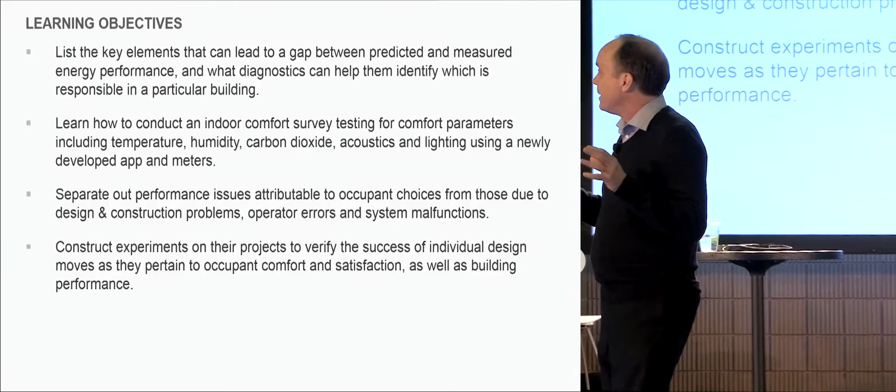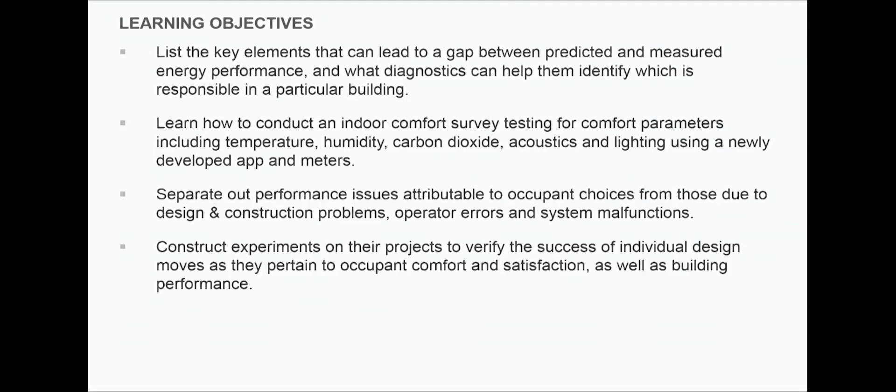So the learning objectives: what we want to be able to talk about are the issues about the gaps between predicted and measured energy performance, and what diagnostics can help us figure out why that's happening. We'll learn how to conduct indoor environmental quality surveys using an incredibly cool new tool, separating out performance issues attributable to occupant choice from those due to design and construction, and how to construct experiments on projects that verify the success of design choices. Not just about occupant satisfaction, but even onto whether something like a collaboration space actually promotes collaboration. So our speakers today, I'm welcoming you here from our home in the beautiful city of New Orleans.

The city from which more round-trip tickets go with the return part unused than any other city in America. Then we'll move on to Lois Vitt Sale, the Chief Sustainability Officer of Wight & Company, Jim Hanford, an associate with Miller Hull, and then Andrea Love from Payette in Boston.

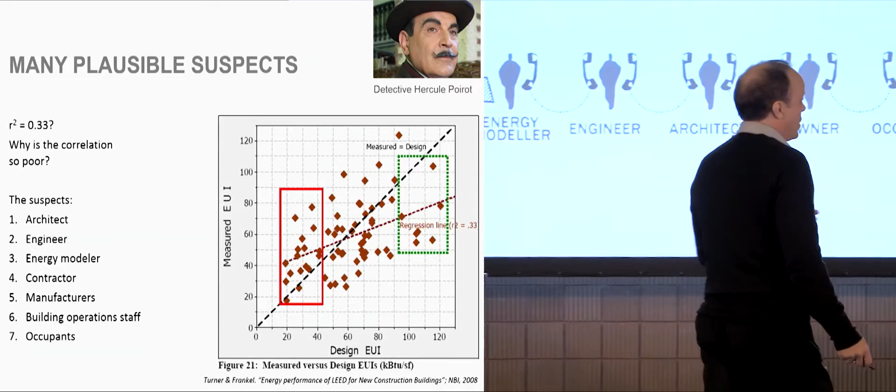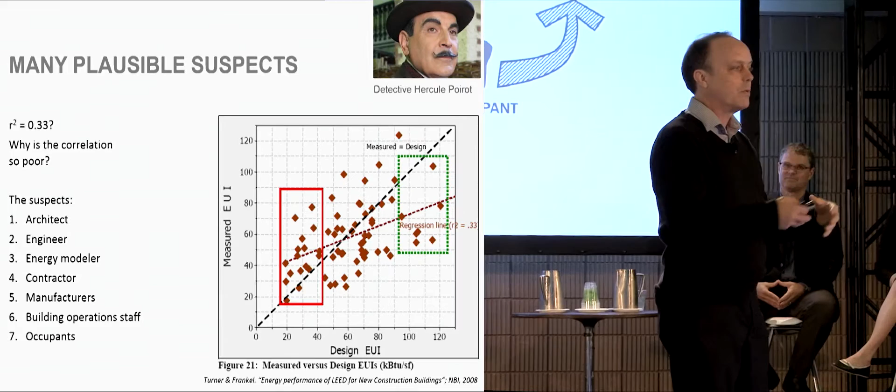So, my hero, Hercule Poirot, the great detective moving the little gray cells on a mystery of the mysterious gap between prediction and performance. We all know about 5 years ago when the New Buildings Institute published this study showing the difference between 100 LEED buildings, what the energy model said in energy use intensity - that's the total amount of energy, gas and electric used, all converted to BTUs per square foot of building construction - what the model said versus what was observed in the first year of performance.

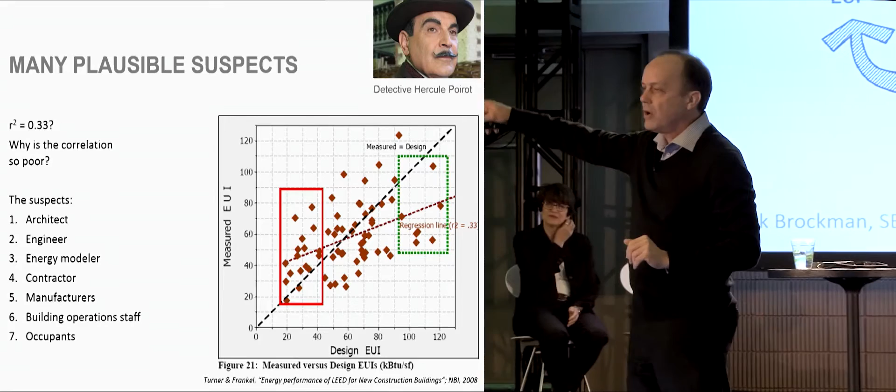And of course, the scary thing for those of you who remember your college statistics is the correlation coefficient in this chart was 0.33, which means to say that design choices, what we all live and care about, are responsible for 1/3 of the variation in measured performance. The 2/3 of the variation in energy performance in buildings was due to something else. So what's the something else?

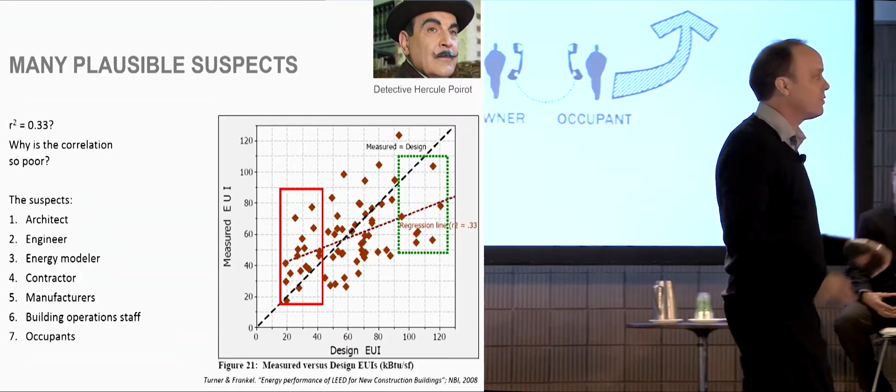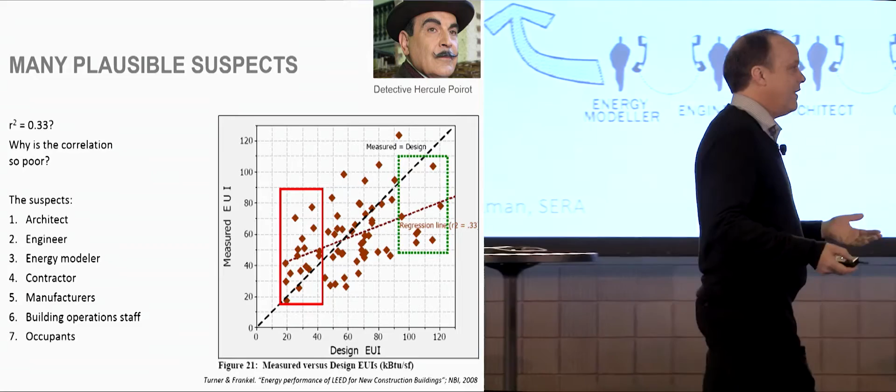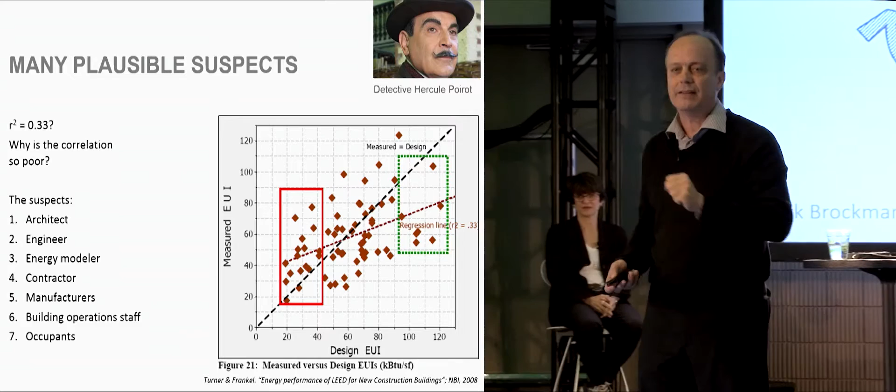Well, it's like a good Agatha Christie novel. There's so many suspects, and we gather them into the drawing room. It could be the architect made a bad design choice. The engineer made miscalculations. The energy modeler could have modeled something that's not exactly what the building was. The contractor, amazingly, might not have built what the construction documents said. Manufacturers might have made a piece of equipment that doesn't actually perform in the way that their spec says. The building operations staff may have said, this ground source heat pump is just too complicated, I'm going to put it back and run the natural gas boiler. Or then there's always those pesky occupants.

So when trying to understand why buildings don't perform as we expected, it's good to remember the Anna Karenina principle: that happy families are all alike, but every unhappy family is unhappy in its own way. So we have to go through and understand this gap by looking at all of the different ways that buildings can be at variance with what we expected.

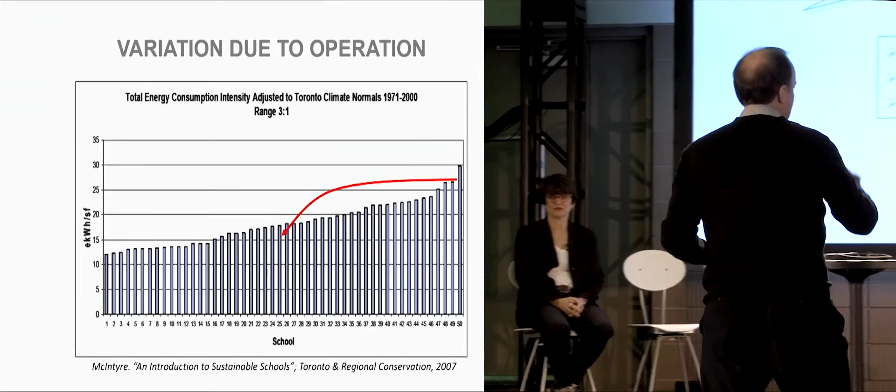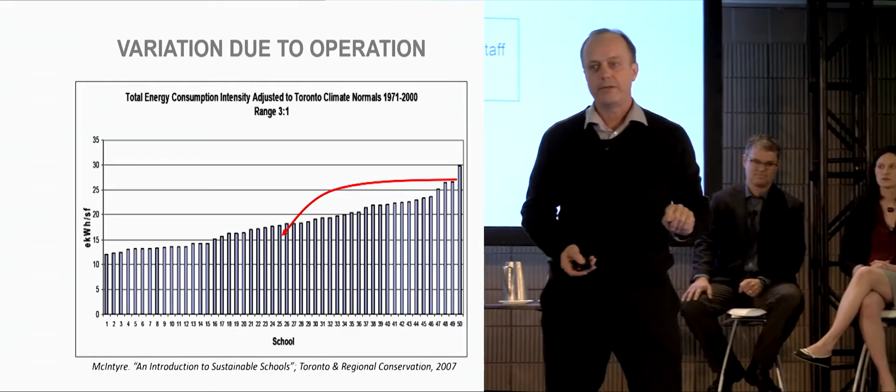So there's this great study from the Toronto Public Schools where they looked at 50 schools built over the same 10-year period, pretty much to the same budget, pretty much similar floor plans, obviously in the same climate, and yet there's a 3-to-1 variation in energy use per square foot. When the principal of the worst performing school was told that that was her school, within 6 months, she had moved to the middle of the pack, not spending any money. It was just she didn't know.

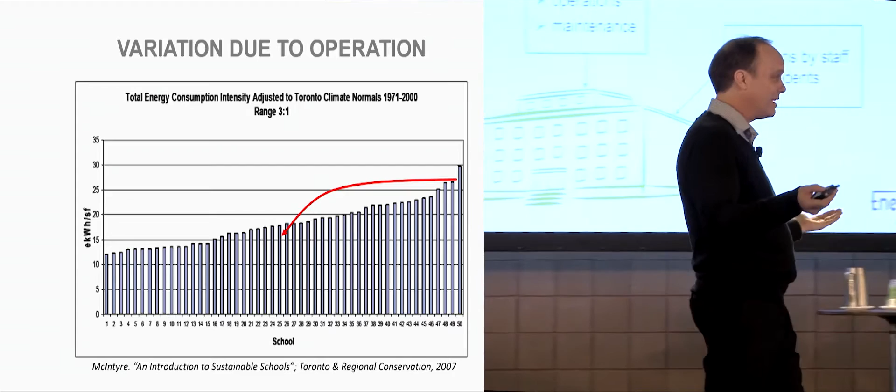And so this notion of providing feedback to people, to just know that my utility bill is not high just because the utility is screwing me - the utility is high, we've met the enemy and he's us - and we have the power to take some of those things back into our own hands.

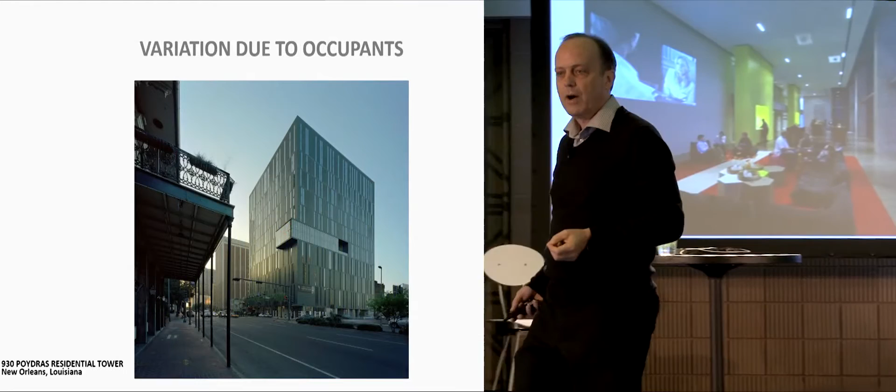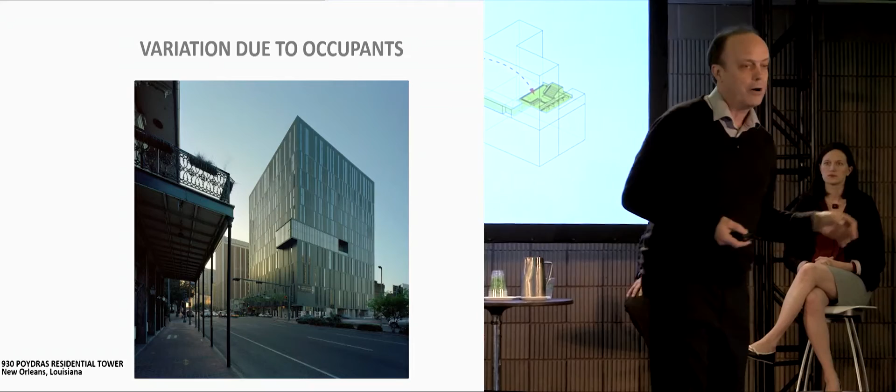We have one of our proud projects that's actually on a walking tour tomorrow, 930 Poydras. This is not a LEED certified building, but is for us the Hubble Space Telescope of building occupancy patterns. There are 250 apartment units in this building. This is one building envelope, one mechanical system, and 250 individually metered and individually read each month by whichever EDR employee pulls the short straw, electric meters. And from this, we can understand the variation due to choice versus how's the building doing.

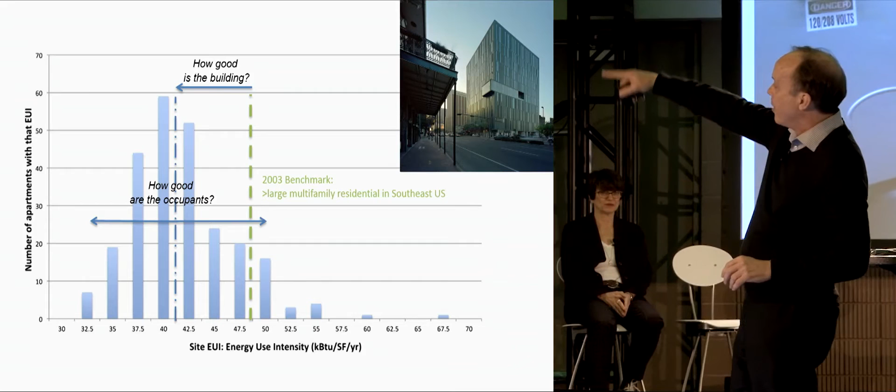So as you can see, this is a bar chart showing the number of apartments using a certain energy use intensity.

There's somebody way out there who may have a grow-op in his apartment. Somebody down at the other end might just be a walk-in that only comes on weekends. But there's this huge 3-to-1 spread that we often see.

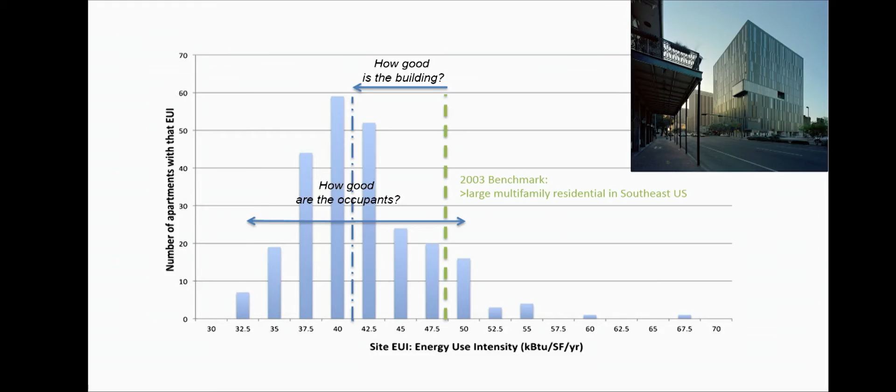Yet the median of this distribution shows us that this is a pretty good building, sort of 25% below the average multifamily apartment building in the Southeast. So there's this distinction between how good the building is and how good the occupants are.

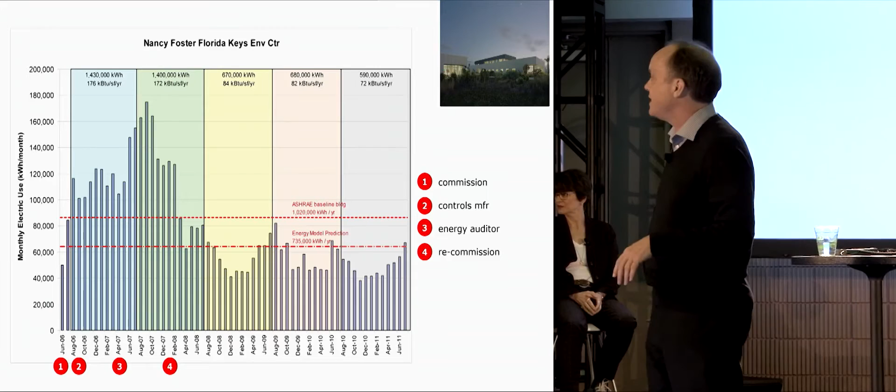The upper red line is sort of the baseline building. The lower red line would be levelized, what the model had said. And then what happened was at month two, the building systems software company said, you're going to love it.

We have a whole new release of the building automation software. Here, let me install it for you. They overwrote all of the commissioning settings in the building, so the building energy use doubled.

The owner called up the commissioning agent, who was based about 1,000 miles away, and said, you know, these bills are a little higher than I was expecting. And the guy said, I will come down for free and do that. Can you spot me the airplane ticket?

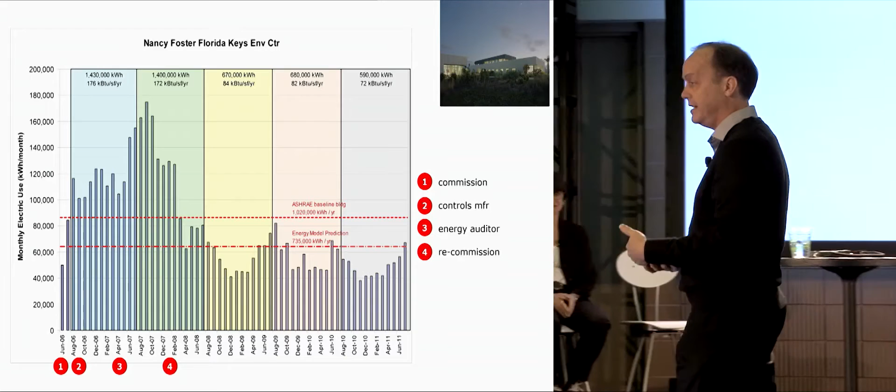And the owner was a government agency. They said, we have no travel budget to fly people in to do things, so we can't do that. So for a year, they endured high energy bills.

And then they found that they had an IDIQ contract with a local energy rater, a guy who did home blower door tests, who came through and said, well, I'm on the contract, I can do this for free. Here, let me adjust things for you.

He adjusted the set point temperature of the air supply. The energy use shot up again another 50%, and that's when the mold bloom happened. Now, after the men in the bunny suits got through cleaning the mold off the walls, they found the problem, spent $300 to fly the guy down, and saved $100,000 in energy bills.

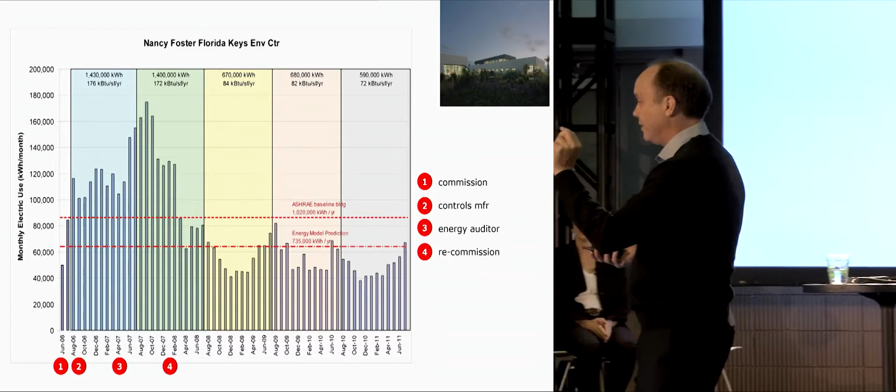And ever since then, that building has been performing actually better than the energy model said. So this is like, for want of a nail the shoe was lost, and for want of a shoe the horse was lost. Very simple things, head-smackingly stupid, but making huge changes, and one of the reasons we often see that buildings don't perform as expected or predicted.

So ever since then, at our firm and at other firms now, we are fanatical about staying connected to the building during that early launch phase and the kind of shakedown as the building maintenance crew, the operators, and the occupants get used to how it works.

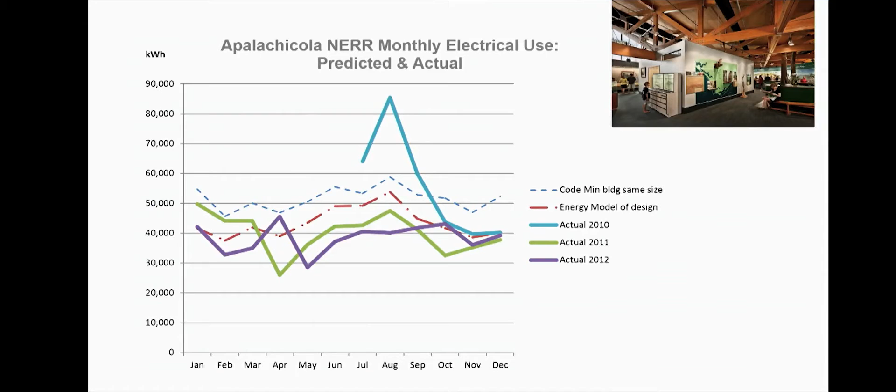This is a visitor center and research lab in Apalachicola, where the upper dashed blue line is the minimum code buildings. And then what the computer model said, it predicted maybe 20% savings.

And during those first four months, again, we found a plethora of, even in a fully commissioned building, people misunderstanding how things were to work and just getting used to stuff.

And if you had just been passive about it and just accepted what was happening, you'd just say, well, those designers must have completely screwed up. But in fact, after that four-month process, the building ever since then has been performing much better than the energy model said, due to a high level of occupant engagement.

Now, we're very proud. On our tours, I hope some of you had a chance to go out to the Make It Right neighborhood and see some of the projects there.

We're very proud when Green Source Magazine called us up and said, you guys win. Your building, your design, is the best performing building in the whole Make It Right neighborhood. It's pretty much net zero. Great. And we said, that's wonderful.

And then we said, well, actually, they're building multiple copies of our design. Let's go check the next one that they built. And so we said we must be geniuses, but then when we checked building number two, we must be idiots. It's the second worst building in the Make It Right neighborhood. And we said, so what's going on?

So we instrumented the building for temperature, humidity, CO2 levels, all kinds of things. And what we found was the occupant in that second building, it was a very heavily used building. He lives in there, and he runs a business there.

His 2 adult sons are there, his grandkids live there. So a very high occupant use, and that's fine, and that's great that we're getting intense use out of a building.

On the other hand, the student team I was working with from Tulane University came by and said, actually, the CO2 levels are up at 2,500 parts per million on some days. And I said, well, that's a bit strange. So we went and looked, and we thought there must be something with the outdoor air unit malfunctioning.

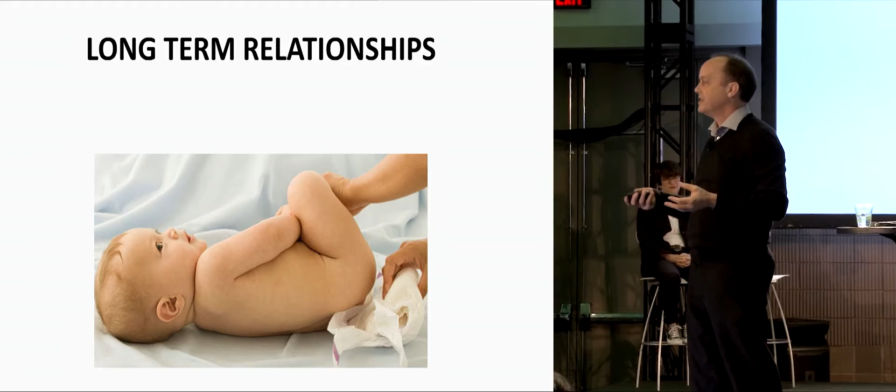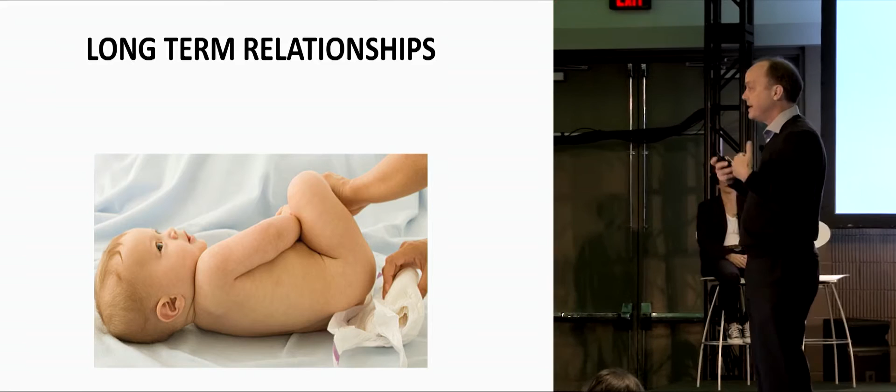So what this finally speaks to is the notion that architects often talk about the design process as they're talking about their baby, this great thing that's going to happen when they're designing their great new building. And just like when your kid is born, there's a pain right at the end of the sequence. My wife tells me that achieving substantial completion on our baby was painful.

But you wouldn't take the great pictures of the newborn and say, that's great, I'll see you later, right? That would be completely irresponsible. And yet, as architects and designers, that's often what we do. So what we're trying to do at our firm, and what other folks here are starting to model, is seeing the design process as really a long-term relationship.

Because the good stuff happens after they're born. The interesting stuff happens after they're born. It's the stuff we get to learn from after they're born.

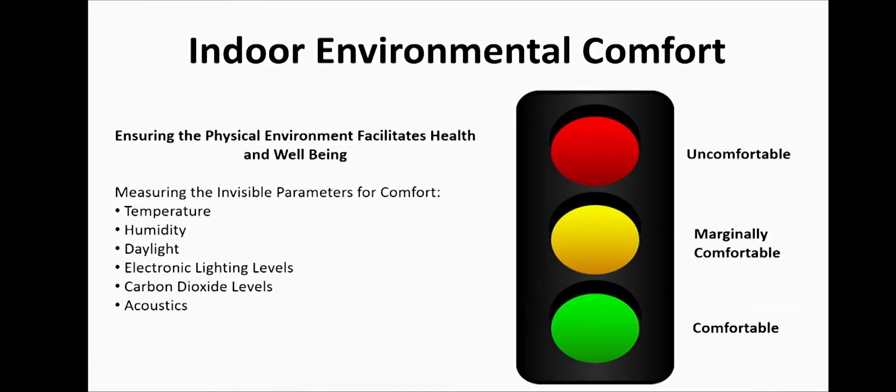Now I'm going to bring up this app, and we're going to just walk you through this tool. In the app, for each of those parameters, we have created a range that's considered comfortable.

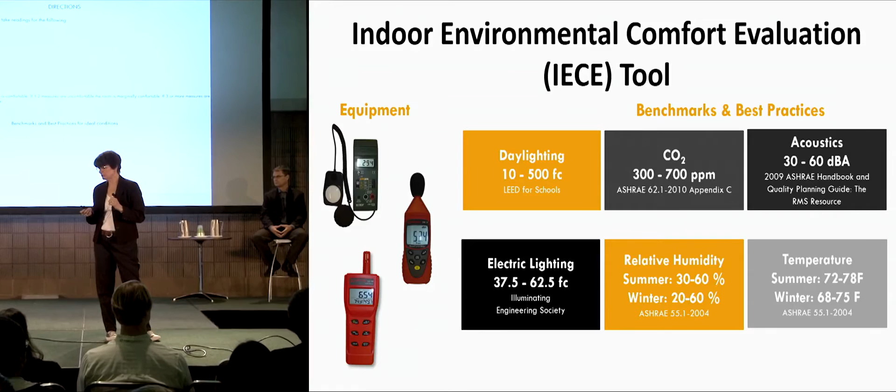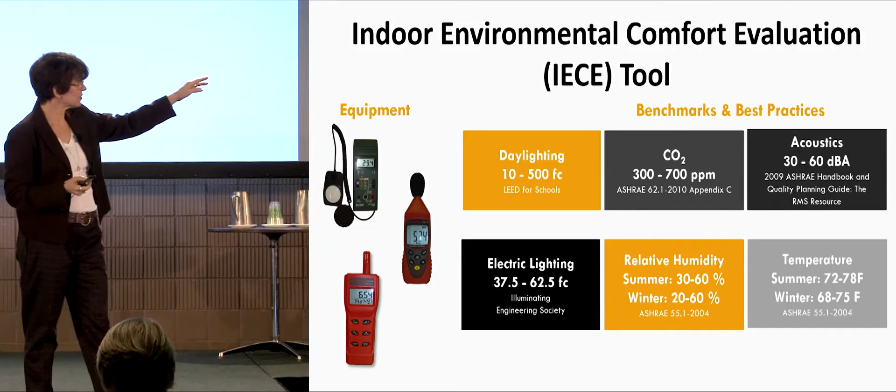And we've used the following benchmark tools, which are also listed on the app, so you could see what the parameters are. This tool right now is really most efficacious for classrooms and for office settings. So those are the ranges that, according to ASHRAE and IES, are listed as within comfort.

You will need meters in order to fill out the survey.

And we're going to name a survey. So let's call this EC13, since this is the session we're in, for ease. And we're going to select summer, because it's not winter conditions here.

And now we get to select which parameters we're going to measure. So we're going to measure acoustics together. We're going to measure temperature, humidity, and CO2 levels, which will be a good indication of whether we've got adequate ventilation. We're not going to measure daylight, because there ain't none. And we're not going to measure electric light, because we're in a performance kind of scenario, and it's really not going to be a valid test, so we don't want to measure that.

So we've turned off those parameters. Now I save the parameters, and I get to go into the survey and add a room. So we're going to call this room 343/345. The type of room we're adding in for our notes as an auditorium, and the floor is the 3rd floor. It automatically puts the date and time, and we're going to note that it is an occupied space.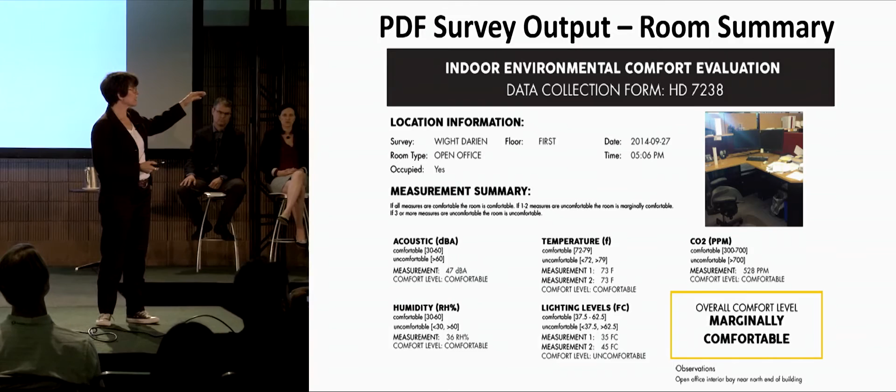It will tell you what the overall comfort level was. It will import the observations that you typed at the bottom of the form. It will tell you what each of the readings were and if they measured comfortable or uncomfortable.

And then it will summarize all of the spaces that you surveyed and give you a handy summary of the spaces, which you can use to take to your clients, to show your design team how you did, and to learn from and about.

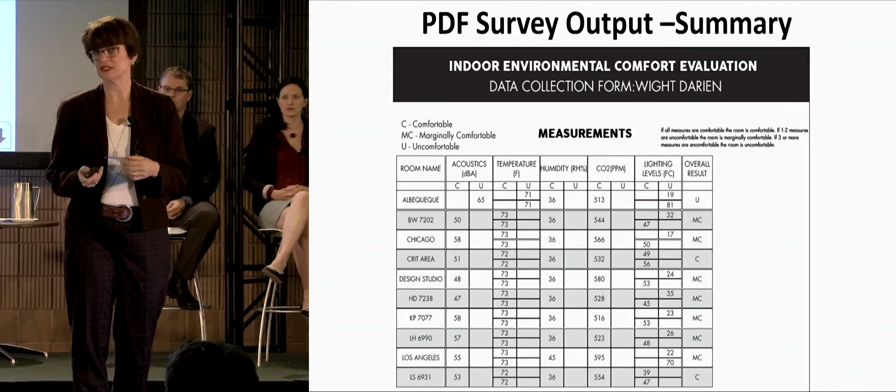And we take this to our clients often on assessments tools and say, okay, so you may have 20 years left in your HVAC system, but you're not delivering adequate ventilation, and therefore you need to make an investment here. And it really helps them see what the performance issues are.

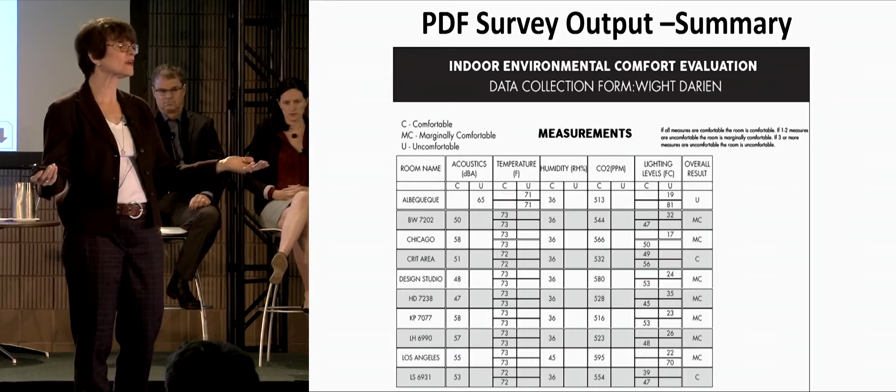So please download the tool and use it. We hope you enjoy it, and we hope that you find it useful. Thank you.

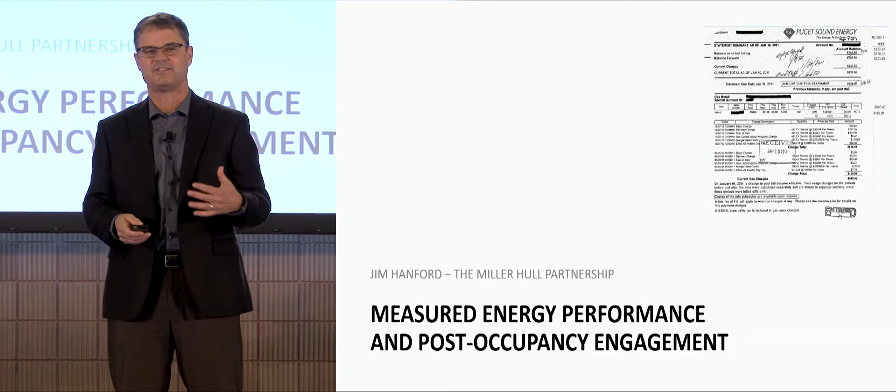The third thing I'm going to talk and end with today is user surveys, which was not initially part of our program, but is now becoming obvious to me that it needs to be.

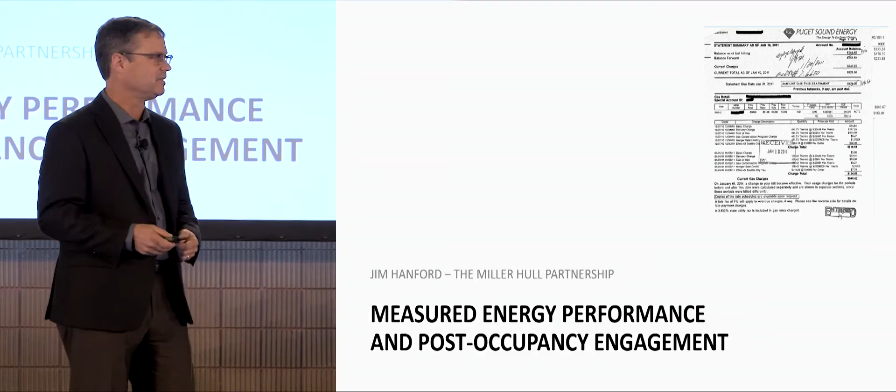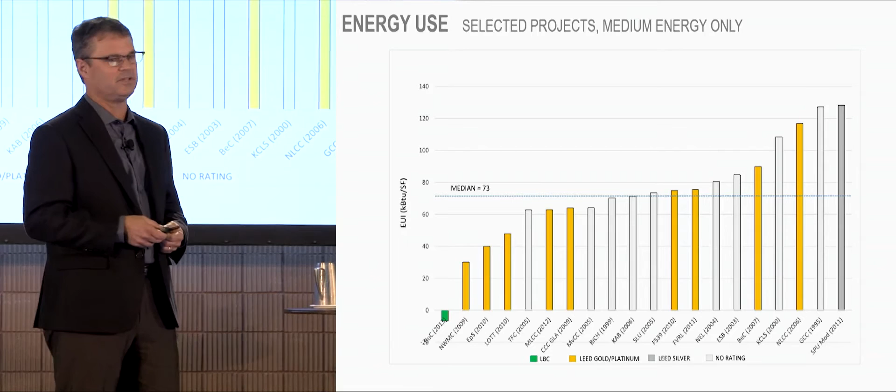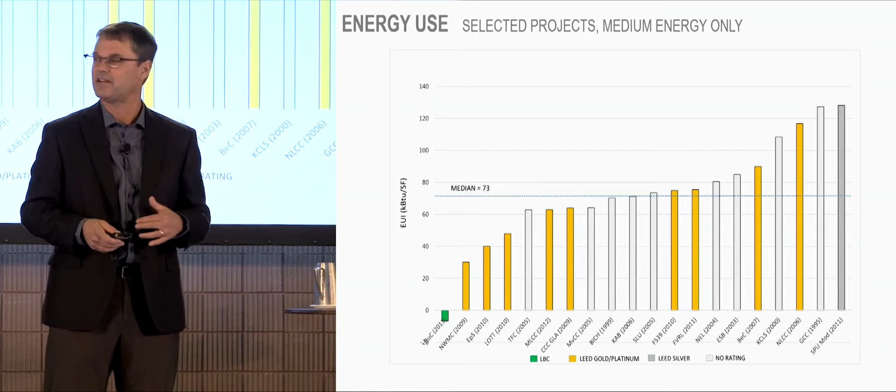And we also have some very good performing buildings at the low end, including one that is currently operating at a net positive, and that shows the power of specific targets around net zero energy and complete buy-in by the design team, the ownership team, and the tenants.

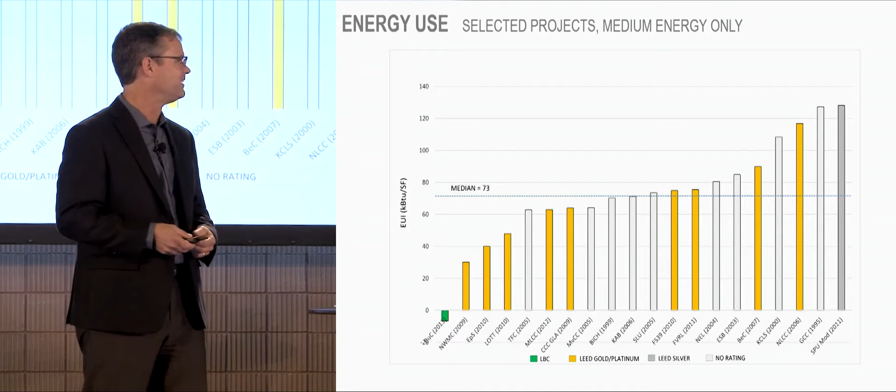The median EUI is 73, which is less than the national average, which is good. It's less than the regional average of 90 EUI, so we felt good about that. But there's a mixture of building types, so there's office, there's public, there's private, there's education.

So if we look at the energy performance versus the project-specific baselines, or the energy savings over a Target Finder or CBECS baseline, again we see a distribution that has some bad energy performers, some good energy performers. The bulk of the data is between 0 and 40% energy savings.

Median is 16%. So on average, we're providing code-level buildings to our clients. And while we may be reporting for 2030 commitments something between 40 to 50% energy savings, maybe 60 in one year, on average over the last 20 years, the average is really 16%.

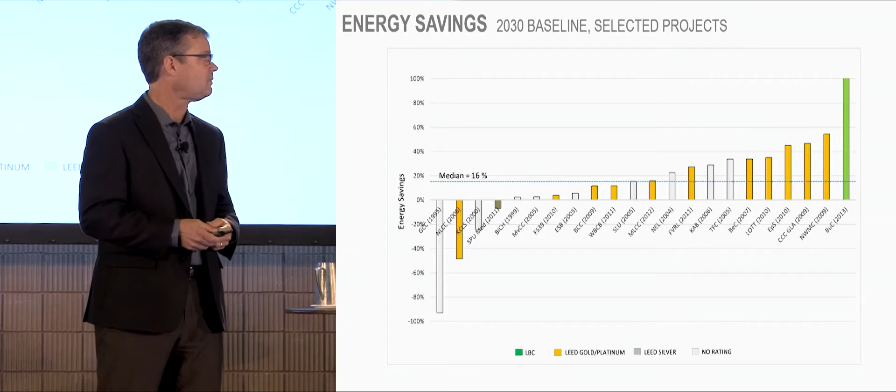So let's look a little bit more in detail at a certain building type, the office building, which was probably the most typical and most well understood commercial building type. And we see these office buildings in this data set of 30, organized by year of construction, and there does seem to be a general downward trend.

There's a few points that look a little different. The first bar is actually an early all-electric building that had ground source heat pumps - it was our first commercial building application of ground source heat pumps. And the next to the last bar is a building that's in a slightly different climate than Western Washington, so it's actually much colder, much hotter there, so HVAC loads are higher.

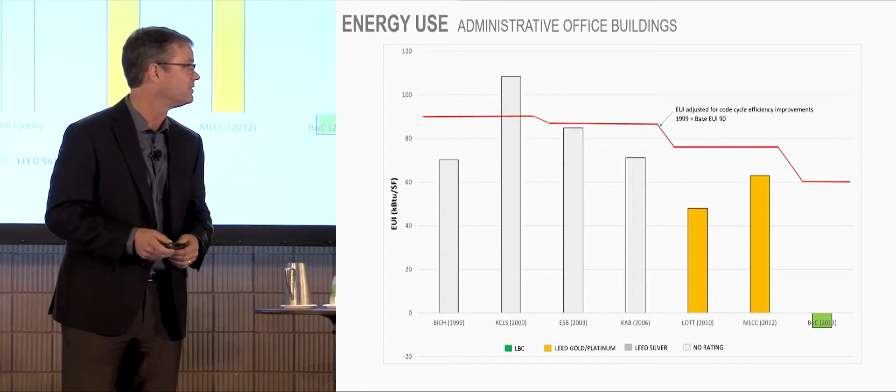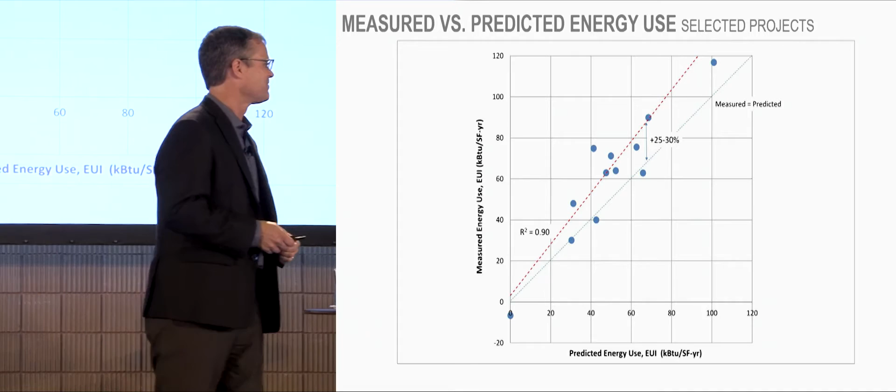Everyone likes to look at measured versus predicted, so this is kind of analogous to - are we getting the same slides on the center side, I guess? You guys aren't getting my B slides, but that's okay. Hold on. Anyway, let's - there we are. Oh, there we go. Perfect.

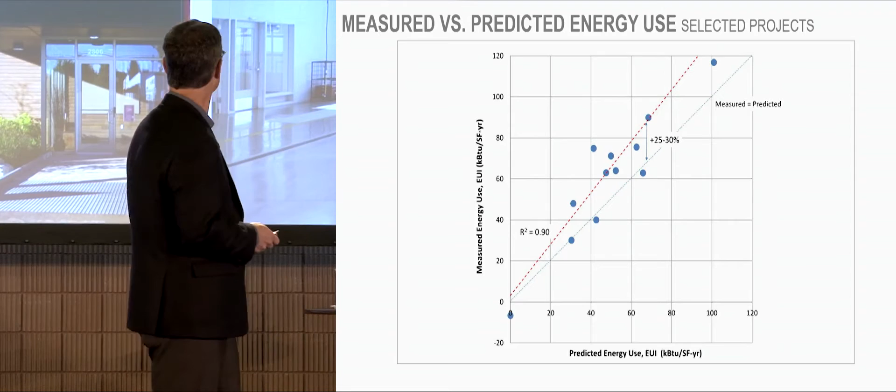So there's the New Buildings Institute graph of the LEED projects, and there's our own graph of our own work. We actually show our projects show a much better correlation. The R squared of this regression line through these points of measured EUI versus predicted EUI is 90%. So predicted EUI is actually a good predictor of energy performance in these projects, but it also shows that they're performing on average 25 to 30% worse than what is predicted by the energy models.

So we start to think about, well, they're operating the building differently than what we thought, or they're doing something wrong. But in reality, what we found is half the time it's because our energy models really aren't very good. So one of the things we've started to do is work more closely with the modeling team to ensure that what is being modeled is accurately representing the design intent and the owner's intent in the energy model, and thereby using it as a tool that's actually useful down the road in post-occupancy, and not just as a LEED point scorecard.

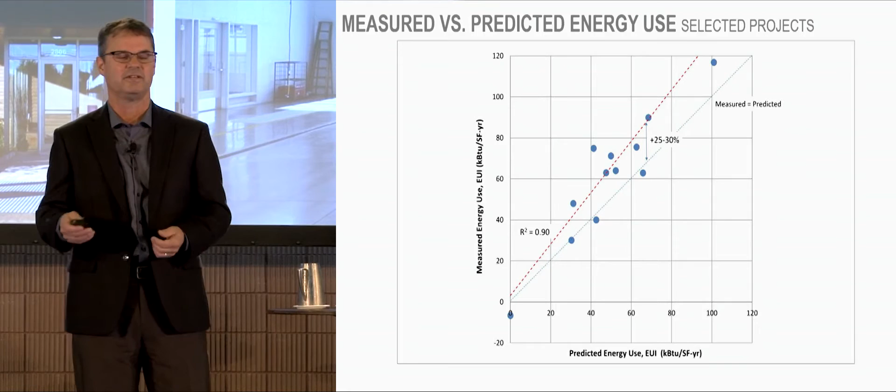The other aspect that I talked about - really the bulk of our post-occupancy work is a qualitative process where we use an interview system with building owners to gather data about the success of the design. So we have a standard format, a list of questions. We have a ranking system that we go through with them, and then we allow for kind of open-ended Q&A with the people we're meeting with. We meet with two groups - one with what we call the design decision makers, the people we were with during the design process.

And making the decisions. We also meet with the facilities operators and building maintenance personnel, so we get more of a nuts and bolts aspect to it, and we get a lot of data. This takes anywhere from half to a full day, and then we go back with these piles of data.

And spend the next week trying to figure out what we really learned and how we can digest this to present back to the design teams within the firm, and the firm as a whole. One of the things we try to find out is what's really successful about this project and what's maybe less than successful. So I took the 5 most recent projects we've done, since the process has been evolving, so these are kind of the 5 best.

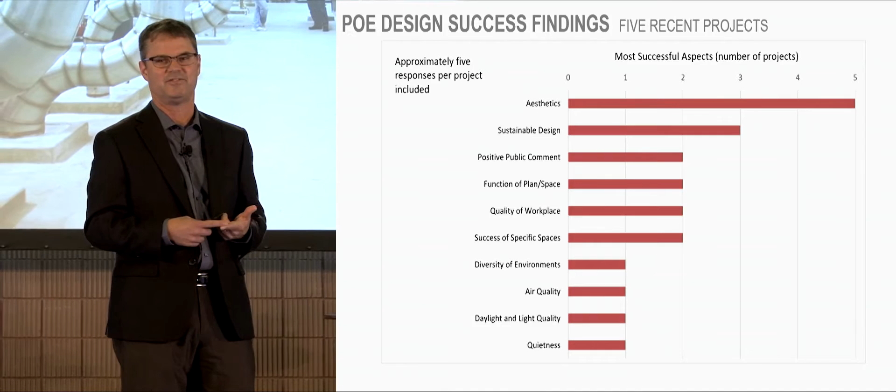We looked at what is reported as the most successful aspects of these projects. These are 5 projects that are LEED Gold or LEED Platinum, have generally good energy performance, although significantly above what we expected them to be. But we do see that on all 5 projects, design was successful. People feel good about how they look and how they feel. Sustainable design is also successful in the majority of these, and then there are a few more project-specific things found to be successful.

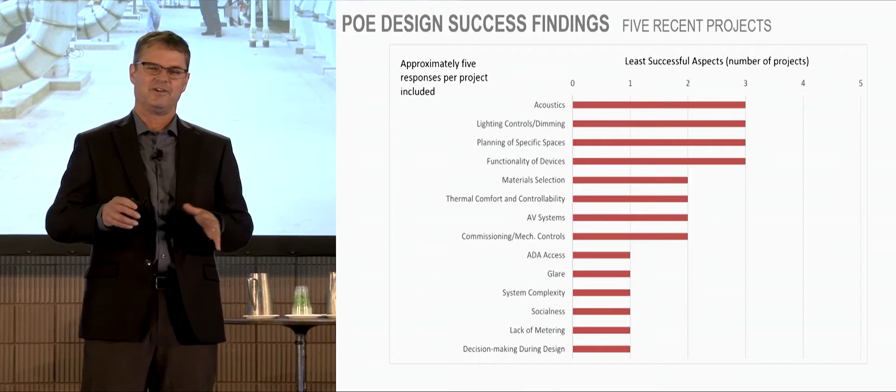In terms of the least successful aspects, I think this relates back to Z's slide about the families. The good families are all the same, so the most successful aspects are similar, but the bad families have a lot of variation. So the least successful aspects tend to be very project-specific, and it's interesting that the usual suspects come up: acoustics, lighting controls, and certain little architectural things we do that we think are neat but maybe don't work out that well in practice.

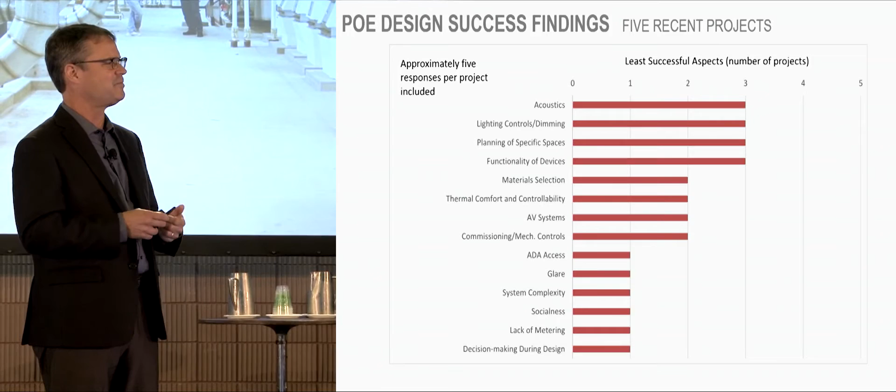There's thermal comfort, audio-visual systems, and commissioning. The interesting thing to me is that commissioning, lighting, and acoustics come up on every project, but they don't necessarily rise to the level of being the least successful aspects on every project.

We also talk about sustainability, about what they see as sustainable about their work or their buildings, and how successful those things are, and what they talk about when discussing the sustainable aspects of their buildings. So in these 5 projects, these are the things seen as sustainable — tangible things that they can point to.

There are things about energy, like PV, which is a tangible expression of energy intent. But most of the things are not about energy, although they may be related to it. So we did all this work looking at energy data, but is that what's really important to owners? It seems like it's not — is that because we don't make a big enough story about it during the design process, or because they're just concerned about other things?

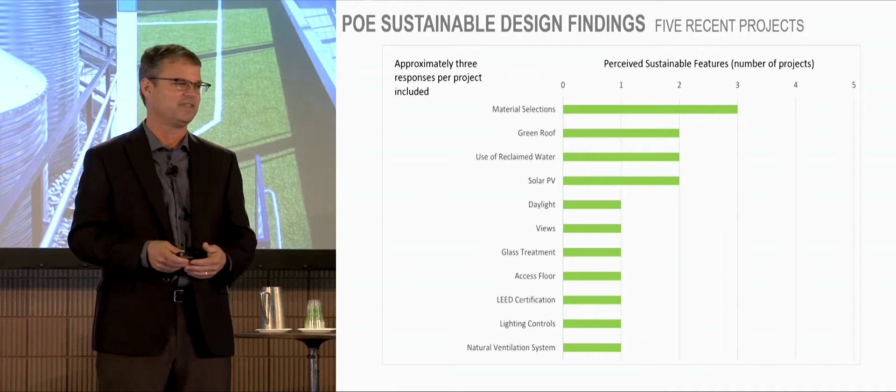I think one of the interesting things is that of these 5 projects, one is an award-winning project — it's won many awards, it's LEED Platinum. But they have an M&V system that doesn't work, and they're actually using 50% more energy than what we expected. We haven't been able to get traction on fixing that M&V system and figuring out what's going on, because they're just so happy with their building that's transformed the way they do work — energy just isn't an important thing for them.

In fact, of all these projects we looked at, there's really only one where energy has been an issue, and that's one of those higher education teaching lab buildings where energy costs are high because that's what they are for lab buildings. It's a publicly funded institution, and they just don't get the budget to operate those kinds of buildings, so there was kind of a mismatch from day one.

I'm going to talk about one last thing, the building that I showed that's operating at net positive, which is being certified under the Living Building Challenge. There's lots of research going on with that building in terms of post-occupancy evaluation — energy use, daylight performance, and all sorts of things. One of the things the Living Building Challenge requires is a beauty and spirit survey to find out what people see about the building and their experiences with it.

So we administered this survey, and it came back very interesting that the top, almost unanimous vote-getter was the fact that we used a heavy timber structure — people really respond to the wood and the exposed wood in the project.

Of the next several items, most of them are about the design of the facade and the windows and the way the space feels in terms of those windows and the connection to the outdoors, the daylighting design, the glare control, the operability of the windows, and the fact that fresh air and natural ventilation is actually a component of the energy system. So this is really positive data that we spent so much time in design transferring money from other aspects of the design into the building skin so that it could operate as a net zero building.

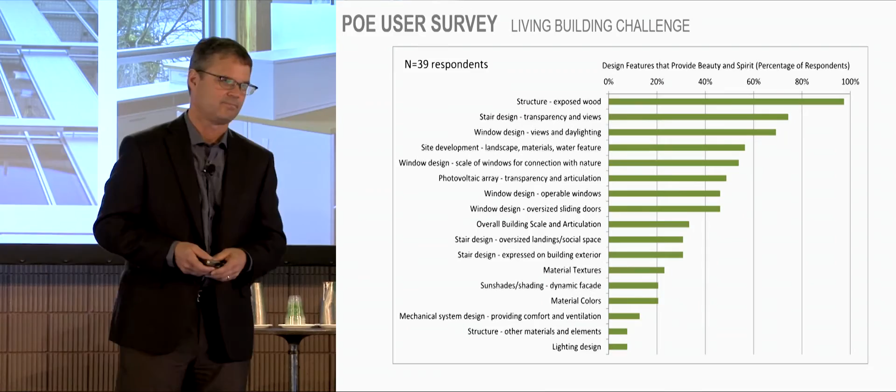So I'm going to talk a little bit about how we've been using our projects to really verify performance in terms of design as well as operational performance.

So we created a sustainability action plan about 3 years ago, as I'm sure many firms have done as well. One of the things we did was set a goal of doing some sort of post-occupancy evaluation for all of our projects, whether it's a closeout interview from a disinterested party to a full-blown surveying and measurements. In that process, we also started doing targeted investigations, where we figured out we could use our past work to really answer some questions that we had during design. So that's what I'm going to talk about.

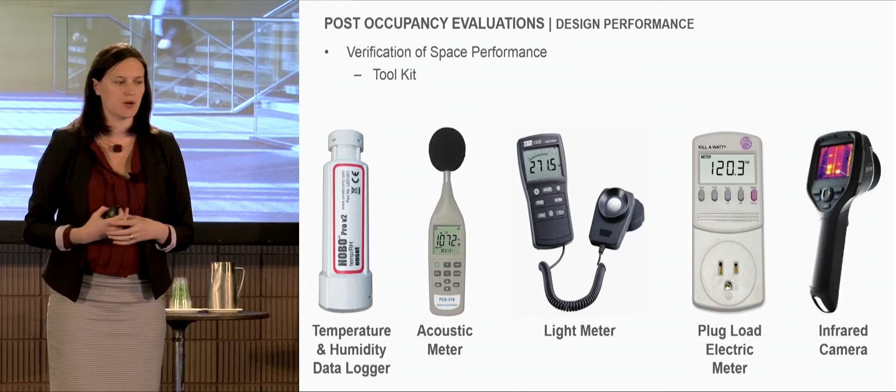So one of the first things we do is verify a lot of the performance targets. This is our toolkit, similar to Lois's, which allows us to measure temperature and humidity, the acoustics in a space, lighting levels, both daylight and electric, and plug loads to understand how much equipment is in use. We do a lot of research labs, and that's a big component of energy usage. And then we have an infrared camera that we can use to look at the envelope performance.

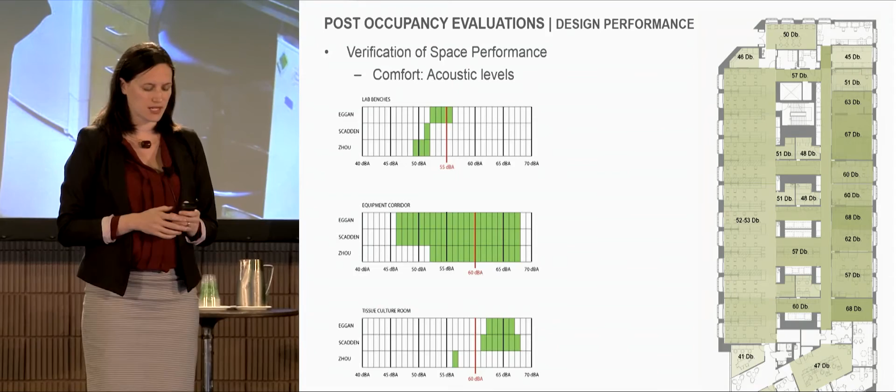So here's an example of some of the things that we create, where we can go around and measure different spaces to see. The red line is the design target for the acoustics, and the green bars are a range that we saw. Some spaces can sometimes be successful and some aren't, and so it allows us to start to understand why some spaces are achieving our targets and some aren't, by doing it at this discretized level.

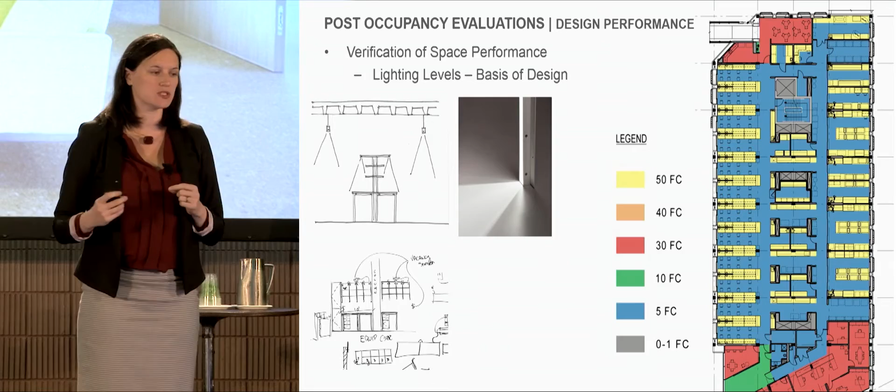It also lets us look at specific things that we might be interested in. For example, in this project, we created a task lighting fixture integrated into the top shelf of a lab bench. We spent a lot of time in development figuring out how to get this LED light in and how it would work, what the control system would be, and we set very specific targets in terms of the lighting levels we wanted to achieve, both on the work surface and just ambient levels.

And so we could go through afterwards and measure to see if our light fixture actually met the target performance. On one side is with the task lights on, and on the other side is with them off, so we can look at what that difference was.

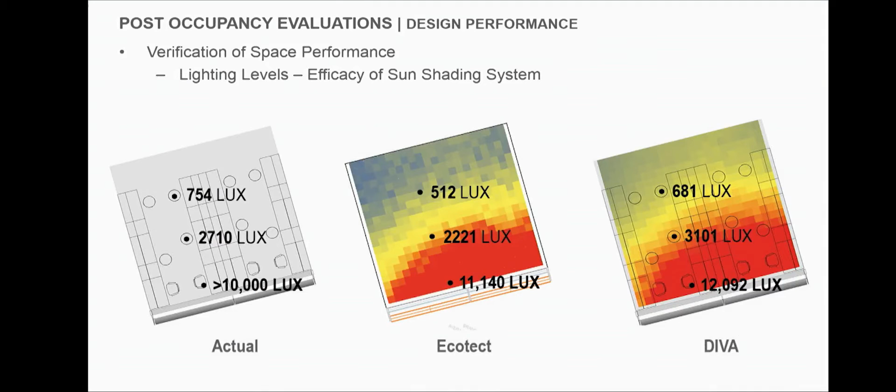One of the other things we can use these tools for is to verify not just the design targets. So this was some measurements for a shading strategy. We took three different measurements that allowed us to see whether or not our sun shading system was working and performing as we thought.

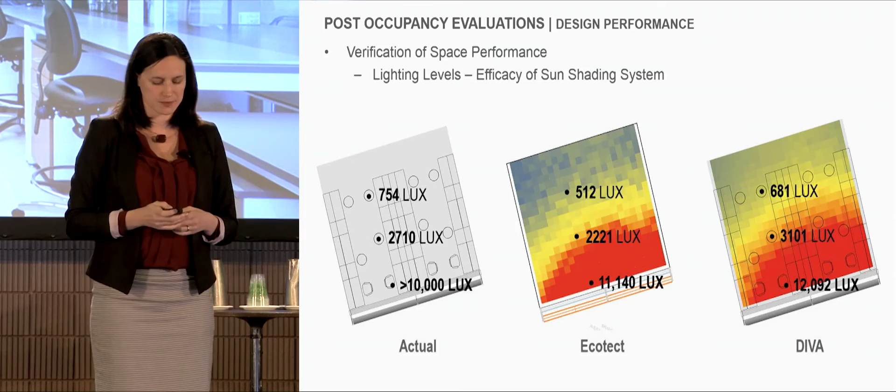The other thing that was interesting was, just like you can verify an energy model and see if performance meets expectations, we could compare it to our design models for daylight simulations to see whether our models were operating as we thought they would, and how accurate the modeling software was. We found it was fairly aligned, which was good to see.

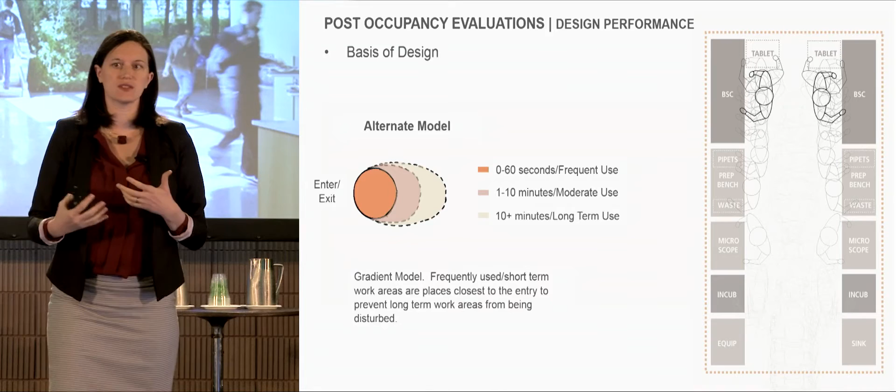Another thing we can do is look at the design assumptions, not just performance, but whether certain spaces are meeting the design requirements we had when we set out on the project. We worked on a project where, from initial observations of the users, we decided to change the layout from what was traditionally done. Spaces typically buried in the core of the building were being used quite a bit now that the research had changed, so we moved them to the exterior to get more daylight.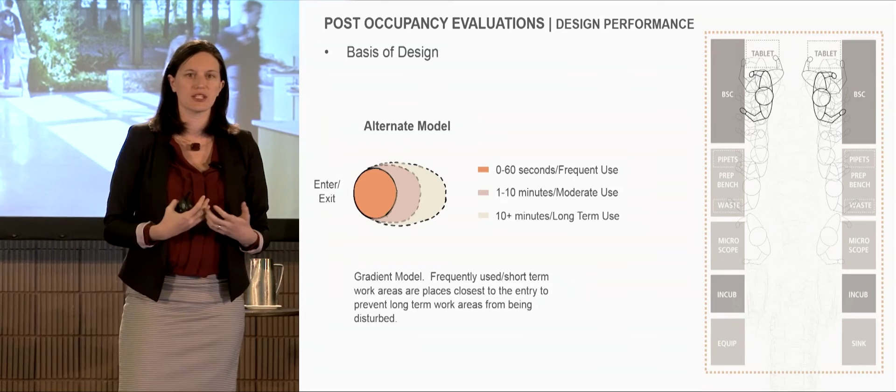In addition, the researchers were working in a lot of silos, so we were trying to figure out ways to foster collaboration and more interaction between them. We used what we call a shadow study, where we went out and spent a few days following the researchers around. On the left-hand side, you can see those bubbles are where they spent most of their time.

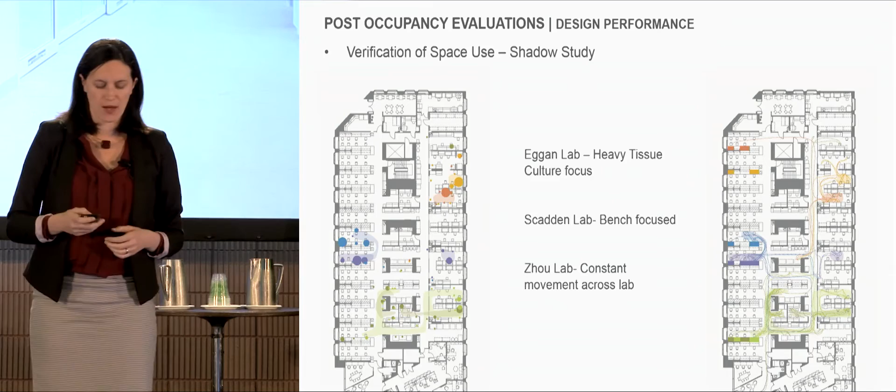Our design assumption about where they were spending time proved true—a lot of their time was in these exterior spaces, so we were glad we moved them to the perimeter for daylight, and we also tracked how they were interacting and moving through the space. Although there was an increase in interaction, they were still somewhat siloed, so we have more work to do there with the different types of research.

One research endeavor we're doing right now is trying to figure out what makes a successful collaboration space. As architects, we often put spaces into a project and say collaboration will occur—magic—and sometimes it works, sometimes it doesn't. We don't really go back and figure out what elements were key in making a collaboration space successful or not. So we started with a survey sent internally to our designers on what we thought made a successful collaboration space, to compare with what we saw in the field.

We did some observations, and we're in the process of doing this right now. This is a work in progress: when are people using spaces? Is it being used at full occupancy? What time of day is it being used? Are we meeting those targets? What activities are going on there? Are people using it as expected, or does it differ? Are they using it as a group or individually? We can track these observations on how people use spaces and see if it meets our expectations from the start of the project.

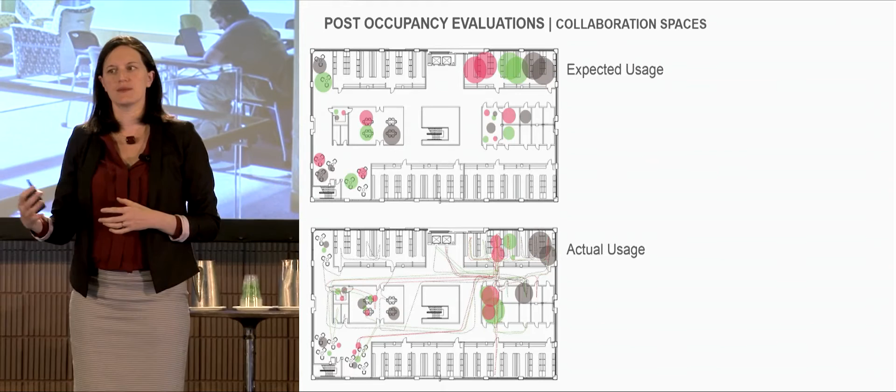And how are they using these spaces? Are they spending time where we thought they would? Similar to the shadow study, are they spending time in the spaces we expected, or using it differently than anticipated? We can compare that to our design assumptions to really see what key elements might create more successful collaboration spaces.

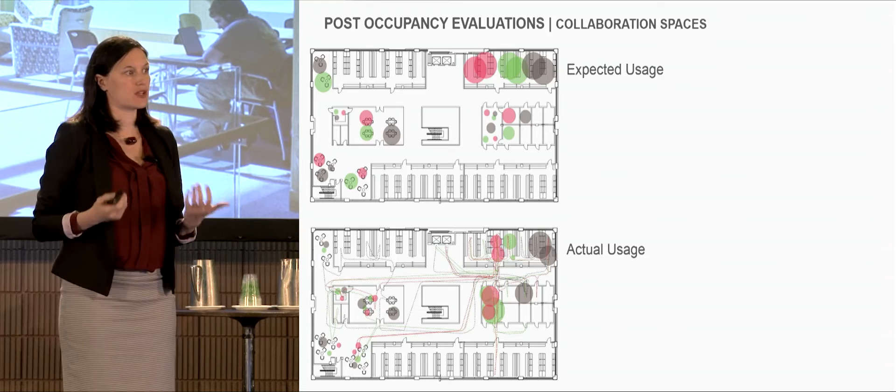The last example I wanted to talk about is one very near and dear to me: thermal bridging. It's something we all, as designers, understand exists in our building envelopes, but it hasn't really been quantified or understood in terms of its significance. So we looked at 15 past projects—we used our own work not because we think it's particularly bad in terms of thermal bridges, we think it's pretty standard for the industry, but because we have all the drawings, specifications, and submittals, so we really know what's in those walls.

So what we can do is go out with our infrared camera and measure what the R value really is in those facades, compare that to what we specified and what we thought it should be, and start to see if we can identify where some of those thermal bridges may occur and how significant they will be. One of the things we did was start to identify common areas where we were typically seeing thermal bridges.

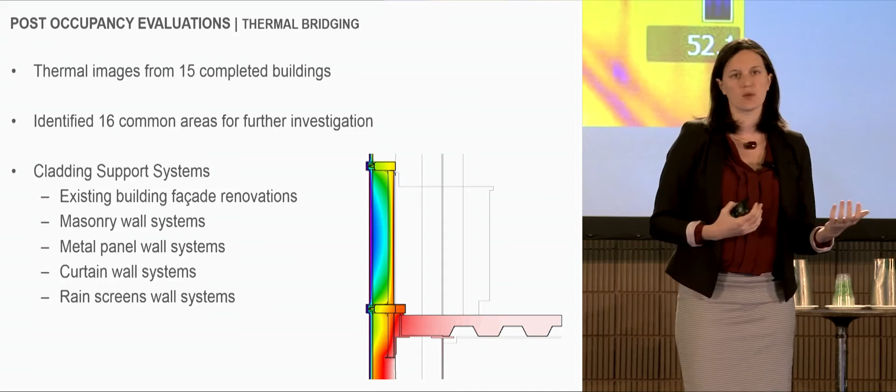They're broken into two areas. One is general cladding support systems, things like masonry walls, shelf angles, and brick ties. The other is transitions and penetrations, areas where we as designers seem to typically fail in maintaining the integrity of the thermal envelope—things like soffits and parapets, and whenever we're trying to change planes, we often get in trouble.

Here are some examples of things we've been finding. This one's looking at windows and the transition between the windows—how a window is supported and the wall system. We all know windows are inherently a thermal bridge because they perform inferior to the solid wall, but that transition and how it connects is very critical.

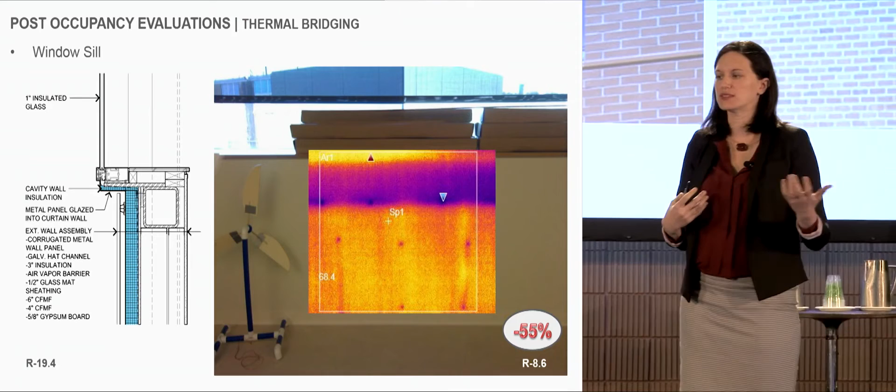We're in Boston, so we're more concerned about heat loss, and you guys, at least in New Orleans, are probably more concerned about heat gain, but we're typically more concerned about the winter condition.

Another common area that performed quite terribly—I should mention the number at the bottom, 72%, is how much less the R value was than what we expected. The R value was actually R 3.5, and it was supposed to be closer to R 12. So it's about 70% less than the R value that was expected for some of these things.

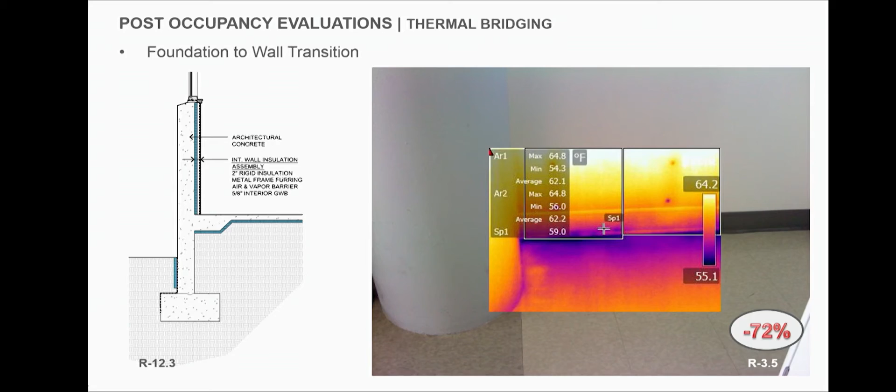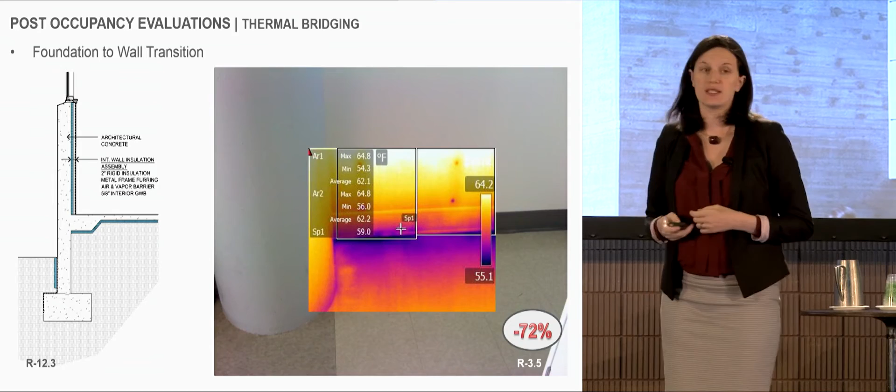Foundation walls were one of the worst culprits, because you may want that concrete to be exposed—so we have foundation on the exterior below grade, then it goes under the slab, and then turns into interior. You can see in the diagram the blue, which highlights the insulation, is going all over the place, with a lot of discontinuities. That's one we've observed to perform quite poorly.

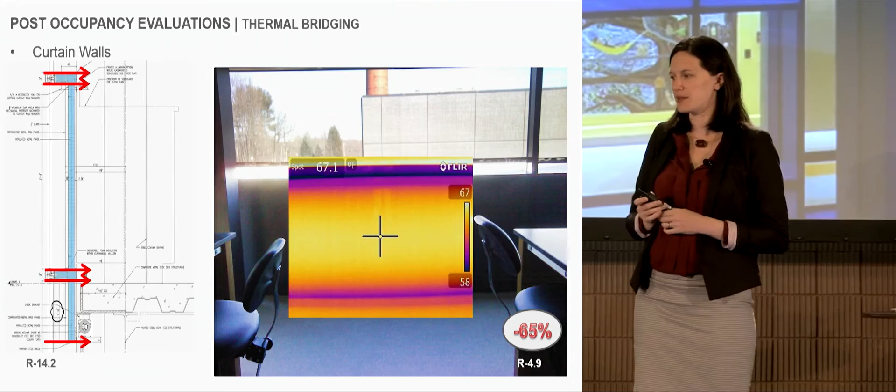The nice thing about doing multiple projects is that you don't just see all the bad examples—though there are many, trust me—there are some good ones too, and you start to learn what things you've done in design actually make a difference.

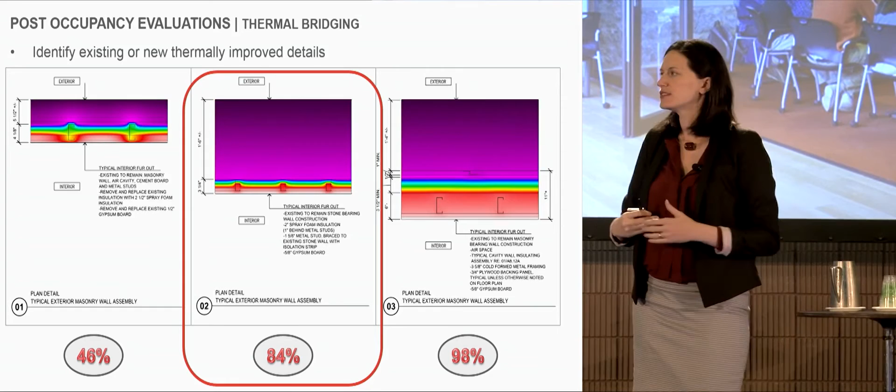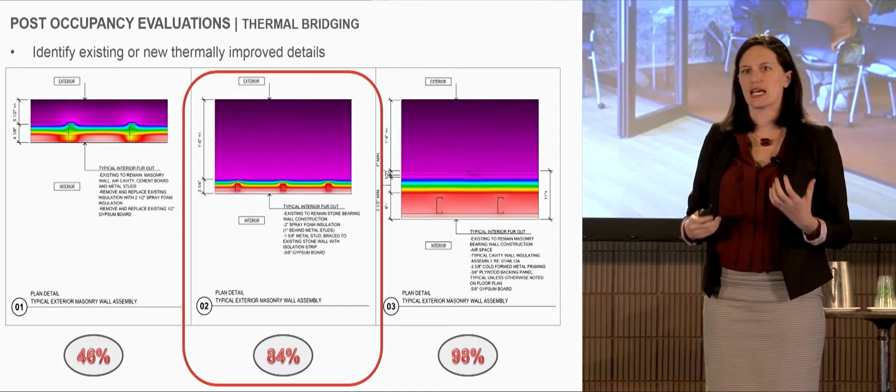Just one inch of continuous insulation really made a big difference. And the last one was completely separated, so we had a very thick wall. If you have the interior space to do that, obviously it performs the best - it was at about 98% of what we thought, which is fairly close. But just that one inch made a big difference. This allows us to compare between different design approaches to understand the impact on performance.

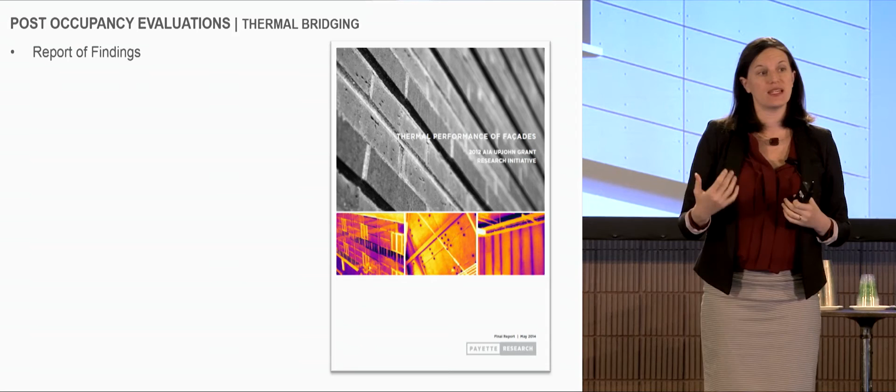Those are just some examples. We have a report coming out on our website November 1st, if you're interested - or a slightly depressing story perhaps. It has over 50 details in it of different ones we've looked at. We tried not just to depress you, but also tried for many of the different systems to have improved examples, through thermal simulations, of how we think we can do these details better. So there are both good and bad examples of what we saw built, as well as ways we think we can improve upon it. Hopefully in another 5 or 10 years, we'll have a new report showing that these improved details we thought would work are performing much better.

And I think that is it. We're open for questions.